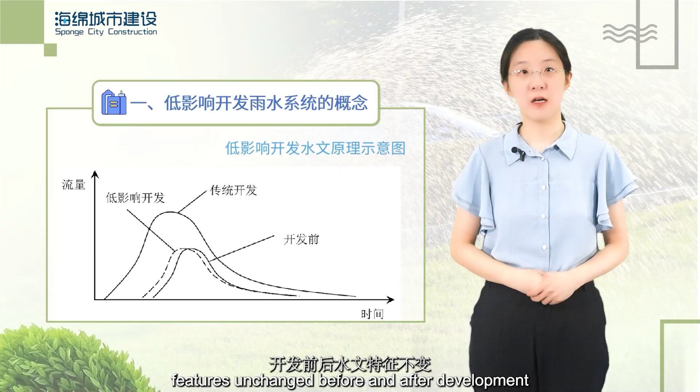Low-impact development refers to using decentralized, source-based measures during site development to maintain the pre-development hydrological characteristics of the site. This approach is also known as low-impact design or low-impact urban design and development. The core principle of LID is to keep hydrological features unchanged before and after development, such as total runoff volume, peak flow rate, and time to peak.

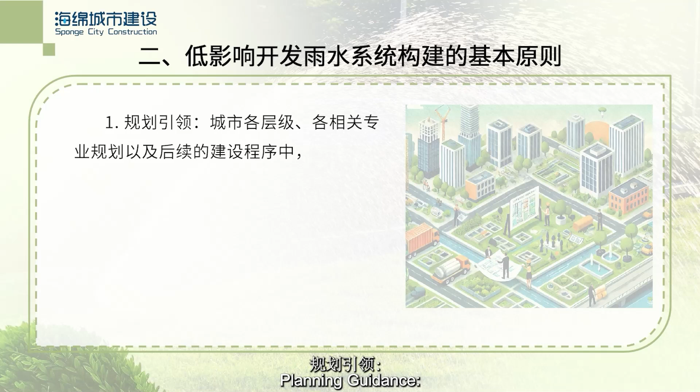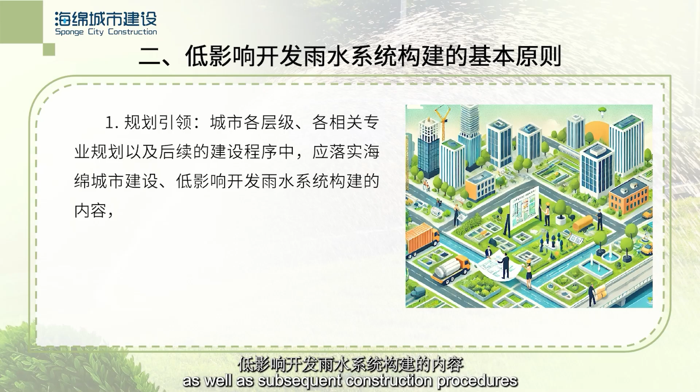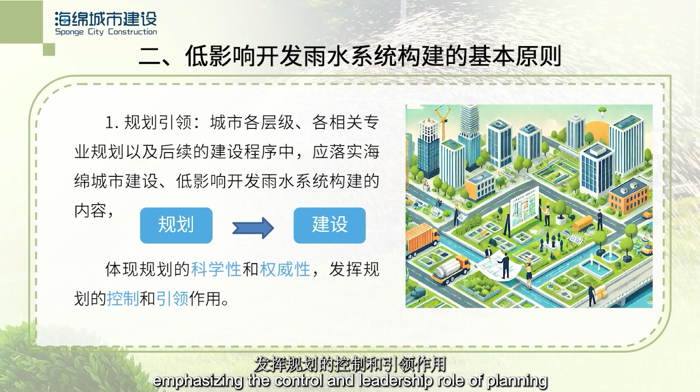Second, basic principles for constructing LID rainwater systems. Planning guidance: the construction of sponge cities and LID rainwater systems should be integrated into all levels of urban planning and related professional fields, as well as subsequent construction procedures. The process should be guided by scientific and authoritative planning to ensure that construction follows a well-established plan, emphasizing the control and leadership role of planning.

Ecological priority: urban planning should scientifically delineate blue and green lines. Urban development should protect water-sensitive areas, such as rivers, lakes, wetlands, ponds, and channels. Natural drainage systems and LID facilities should be prioritized to achieve natural water storage, infiltration, purification, and sustainable water circulation. This approach enhances the natural restoration capabilities of the water ecosystem and maintains the city's ecological functions.

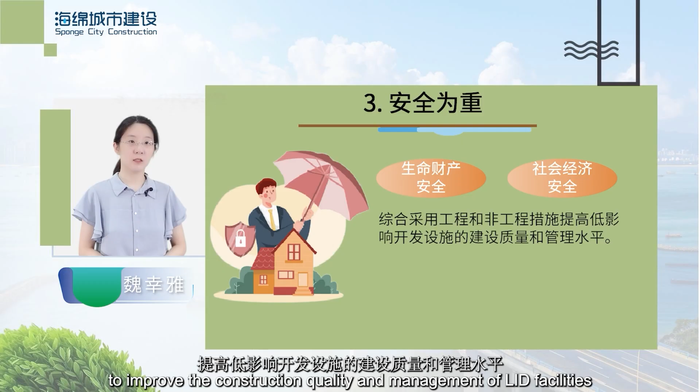Safety first: the primary goal should be to protect people's lives, property, and socio-economic stability. Both engineering and non-engineering measures should be applied to improve the construction quality and management of LID facilities, eliminate safety hazards, enhance capabilities of disaster prevention and mitigation, and ensure urban water safety.

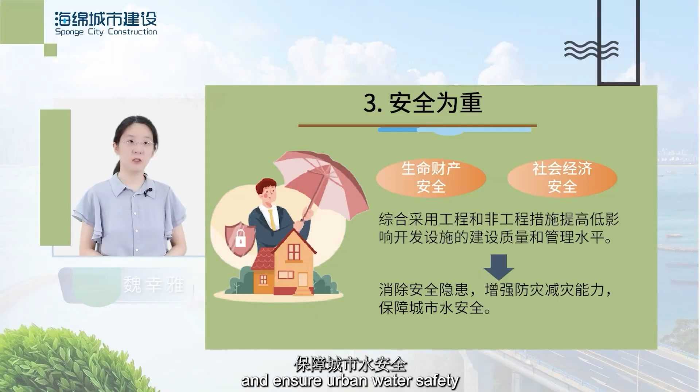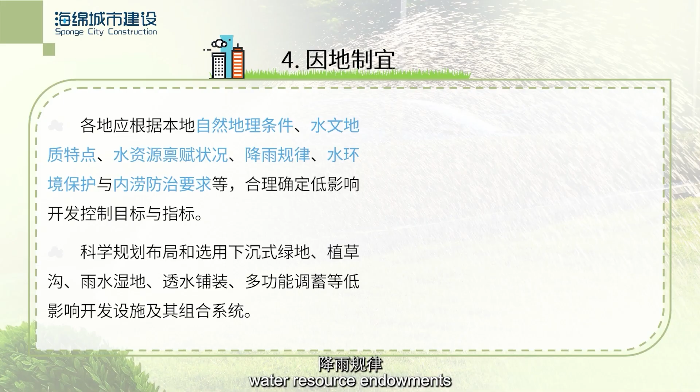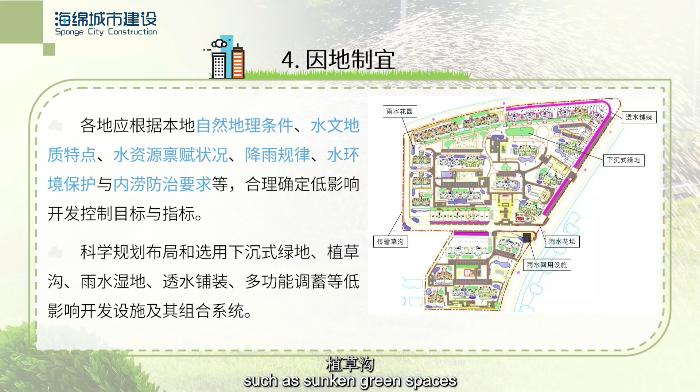Adaptation to local conditions: LID goals and indicators should be determined based on local natural geographic conditions, hydrogeological features, water resource endowments, rainfall patterns, water environment protection, and flood prevention requirements. The scientific planning and selection of LID facilities, such as sunken green spaces, vegetated swales, rainwater wetlands, permeable pavements, and multifunctional storage systems, should be tailored to local conditions.

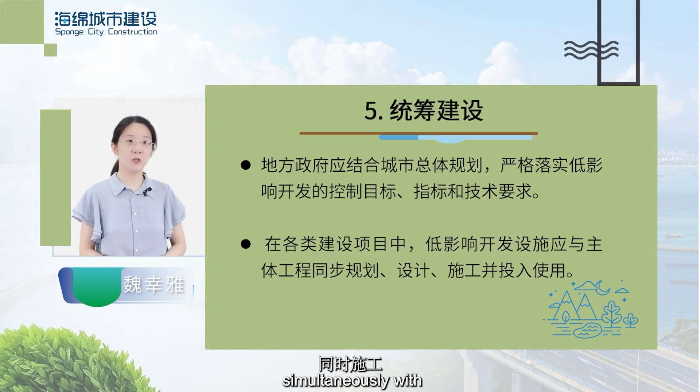Coordinated construction: local governments should integrate the overall planning and construction of the city to ensure that LID control goals in various levels of relevant planning are strictly implemented. In all construction projects, LID facilities should be planned, designed, constructed, and put into operation simultaneously with the main project works. Third, approaches to constructing LID rainwater systems.

In the process of urban construction, it is essential to integrate LID concepts into all stages, including urban planning, design, implementation, and operation. This requires the coordinated efforts of various professionals in urban planning, drainage, landscaping, transportation, architecture, and hydrology to collectively achieve LID control goals.

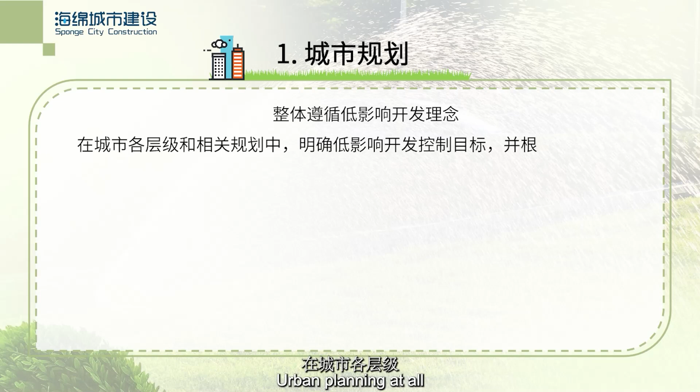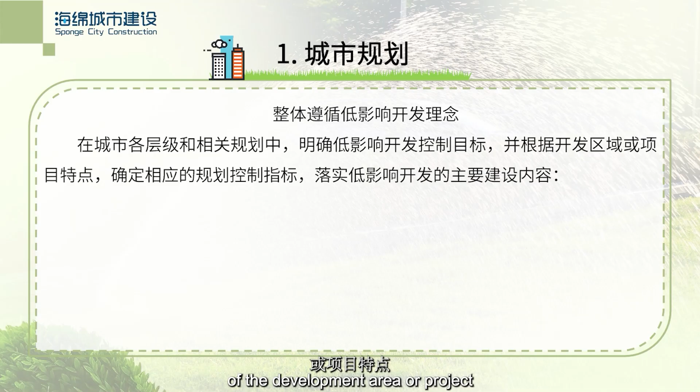Urban planning at all levels should adhere to LID principles by setting clear control goals for low-impact development. These goals should be aligned with the characteristics of the development area or project, and corresponding planning control indicators should be established to ensure that key aspects of LID construction are implemented.

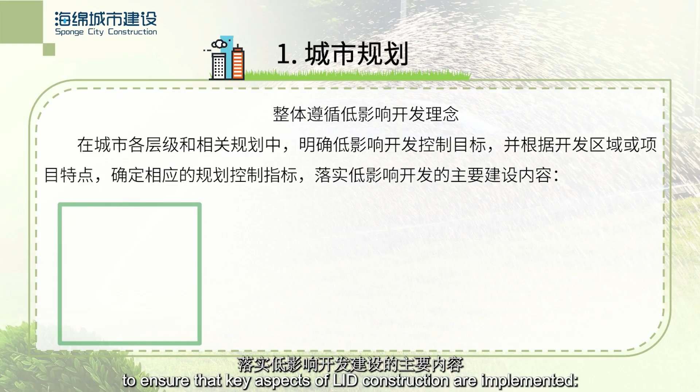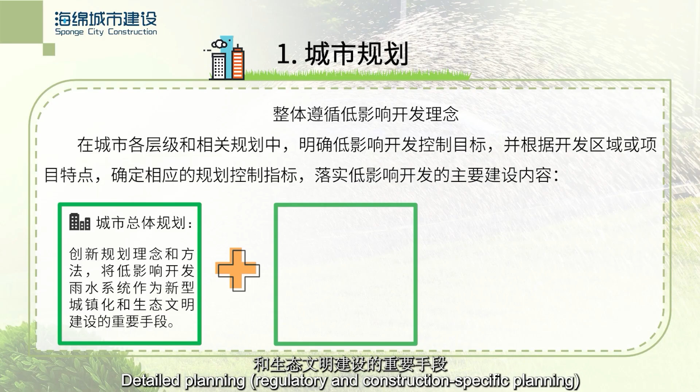Overall, urban planning should innovate planning concepts and methods, making LID rainwater systems a crucial part of new urbanization and ecological civilization. Detailed planning, regulatory and construction-specific planning ensures that the LID control goals and indicators set by the overall urban plan and related specialized plans are implemented.

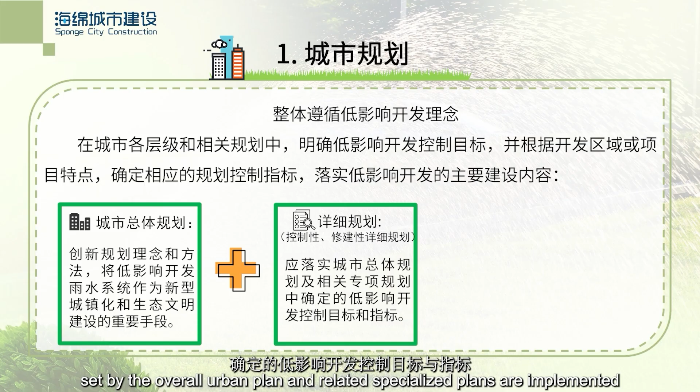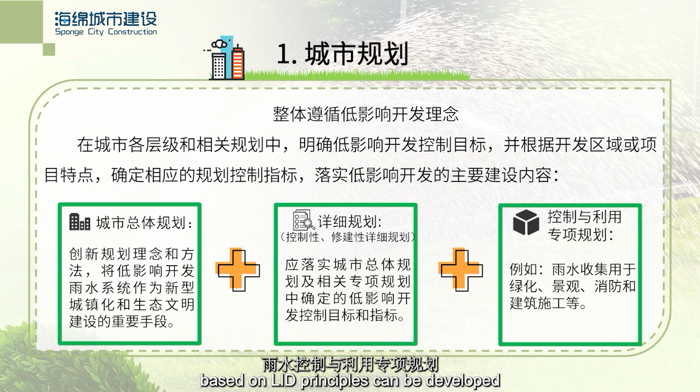In cities or new districts where conditions allow, a specialized rainwater control and utilization plan based on LID principles can be developed. For instance, rainwater can be collected for use in landscaping irrigation, water features, firefighting, and construction activities. Engineering design:

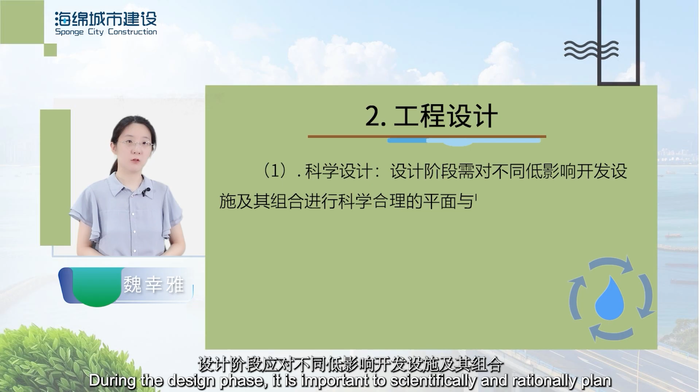During the design phase, it is important to scientifically and rationally plan both the horizontal and vertical aspects of various LID facilities and their combinations. In the planning and construction of buildings, residential areas, urban roads, green spaces, plazas, and water systems, open spaces like landscape water bodies and waterfront areas should be considered.

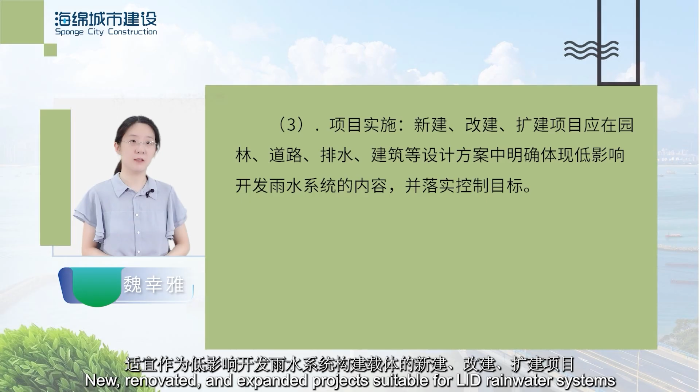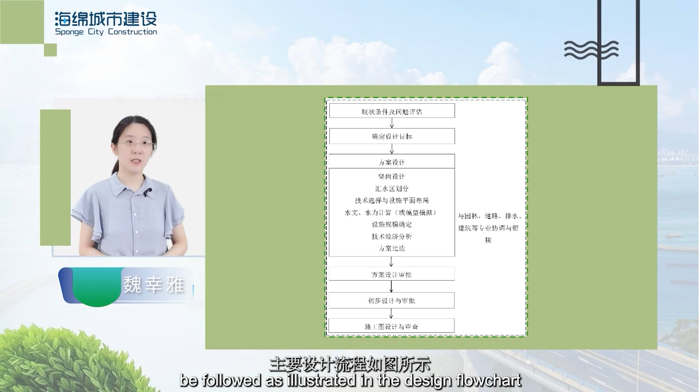For LID facilities and rainwater systems, new, renovated, and expanded projects suitable for the rainwater systems should clearly incorporate the design elements in their landscaping, transportation, drainage, and architectural design plans. This ensures that the LID control goals are effectively implemented. The main design process for the rainwater systems should be followed as illustrated in the design flowchart. Examples of LID design elements include rain gardens along streets and ecological drainage ditches. Construction and implementation:

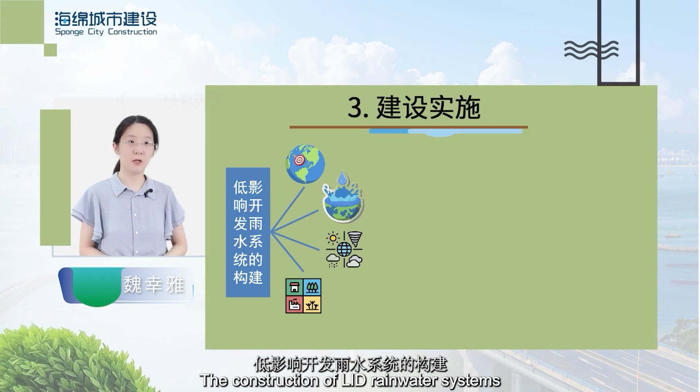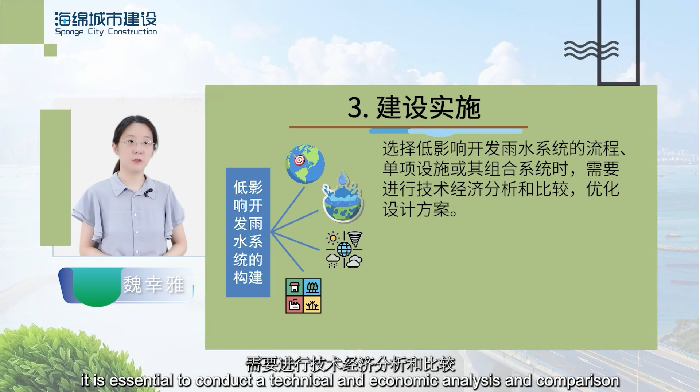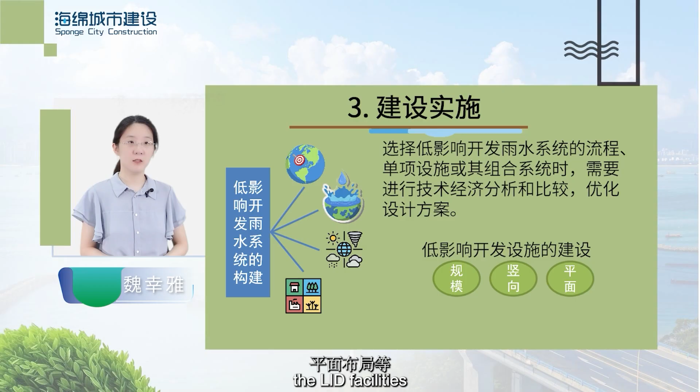The construction of the rainwater systems is closely linked to the planning control objectives, meteorological conditions, and land use characteristics of the area. Therefore, when selecting the process, individual facilities, or combination systems for the rainwater systems, it is essential to conduct a technical and economic analysis and comparison to optimize the design. The scale, vertical and horizontal layout of the LID facilities should be strictly controlled according to the planning and design documents.

There should be a quality control and inspection system specifically for LID rainwater systems at the construction site. All materials, semi-finished products, components, and equipment used for LID facilities must be inspected and accepted upon arrival at the construction site following relevant requirements.

Effective soil and water conservation measures should be implemented to minimize the disturbance and damage to the site and its surroundings during construction. In regions where conditions allow, the acceptance of LID rainwater facilities can be conducted after the entire project has undergone a rain season to test its effectiveness. The construction of sponge facilities differs from traditional engineering methods, and inadequate quality control during construction can lead to inconsistent performance of the facilities.

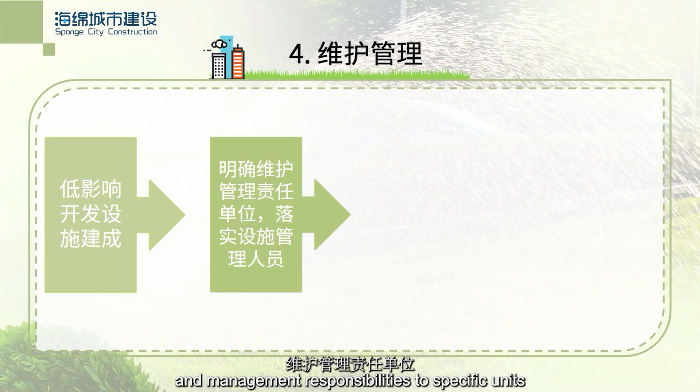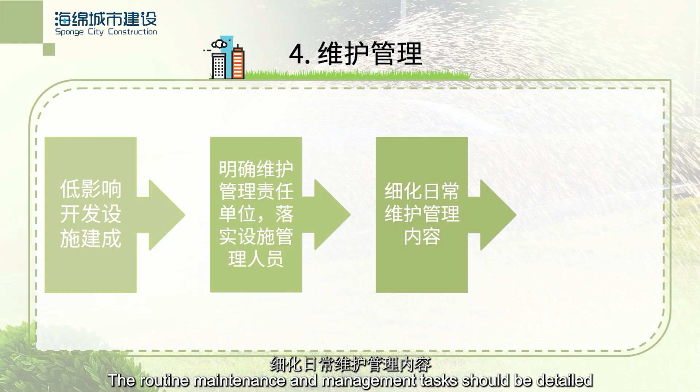Maintenance and management. After the completion of LID facilities, it is crucial to clearly assign maintenance and management responsibilities to specific units and ensure that personnel are in place to oversee these facilities. The routine maintenance and management tasks should be detailed to ensure the correct operation of facilities. A comprehensive maintenance and management system should be established.

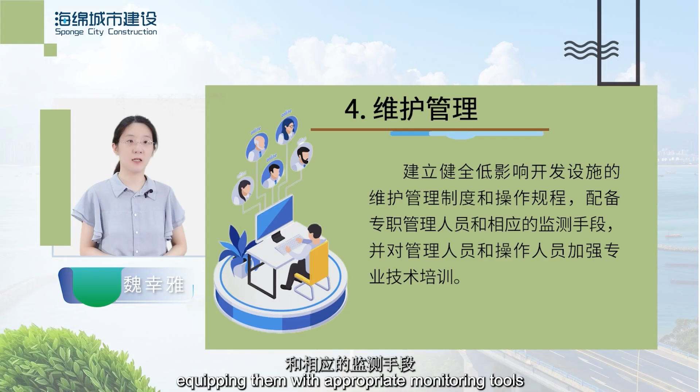This includes appointing dedicated management personnel, equipping them with appropriate monitoring tools, and providing professional technical training for both management and operational staff. Regular inspections and maintenance of the facilities should be conducted before and during the rainy season to ensure safe and effective operation.

The development of databases for LID facilities and the application of information technology should be enhanced. By utilizing digital information technologies, scientific planning and design can be conducted, providing a solid foundation for the construction and operation of LID rainwater systems.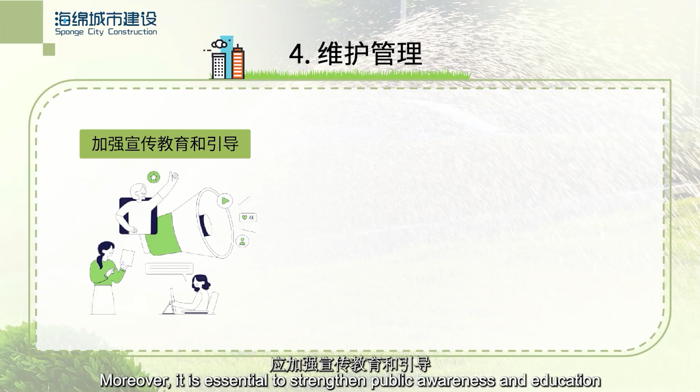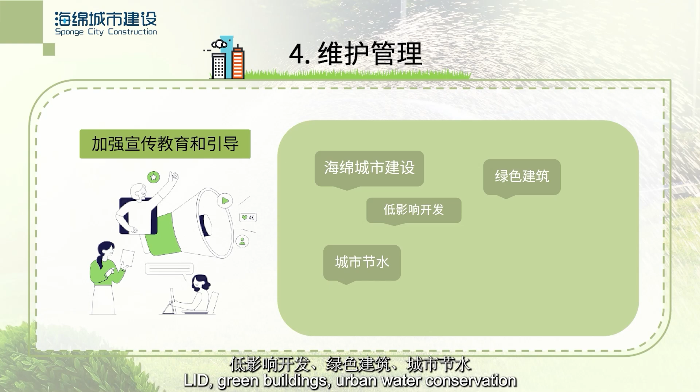Moreover, it is essential to strengthen public awareness and education regarding the importance of rainwater control and utilization in sponge city construction, LID, green buildings, urban water conservation, water ecosystem restoration, and flood prevention. Public participation in the construction, operation, and maintenance of LID facilities should be actively encouraged.